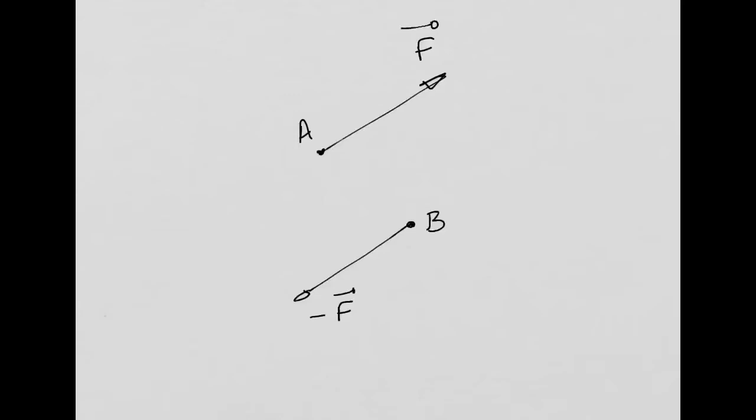If you have two forces that are opposite, with the same norm but opposite direction, they cancel each other. These two forces form what we call a couple. Not difficult to memorize this, I think.

So what I'm going to do now is calculate the moment produced by this couple, or by these two forces, about, for example, this point O.

In order to do that, I need to define my position vectors. I need to define this position vector connecting point O to point A, which I'll call ROA. And I need to define this position vector connecting point O with point B, which I'll call ROB.

So we have a couple, these two symmetric forces, and I'm going to calculate the moment produced by this couple about point O. That moment, MO, is equal to the cross product of my position vector ROA with my force F.

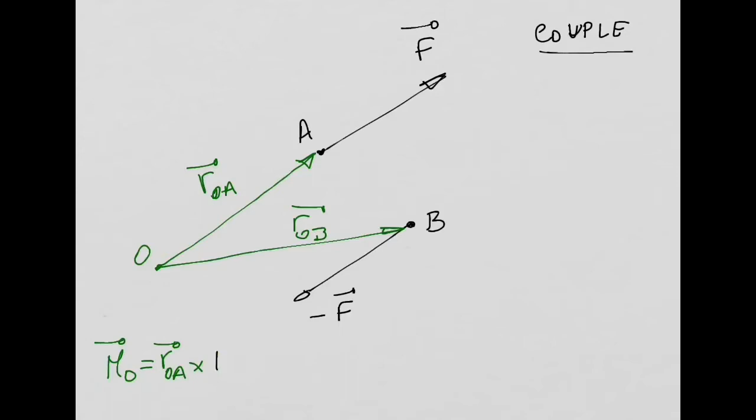Plus the moment produced by my position vector ROB times my force, which is minus F. You all agree with me?

So I have two forces here, F and minus F. I want to calculate the moment about point O. I just need to add the contribution of my force F to the moment plus the contribution of my force minus F to the moment, right?

Now I can work this a little bit. I can say that I will have ROA minus ROB, sending this minus sign to the position vector. I can do that, and then I multiply this by F.

And now this ROA minus ROB, this term here, I'm going to say is equal to my R vector, or if you want, I can say this is going to be equal to RBA, which is a vector connecting point B with point A. So I am subtracting two vectors, and the result of that subtraction is this vector that you have here in red, RBA, connecting point B with point A.

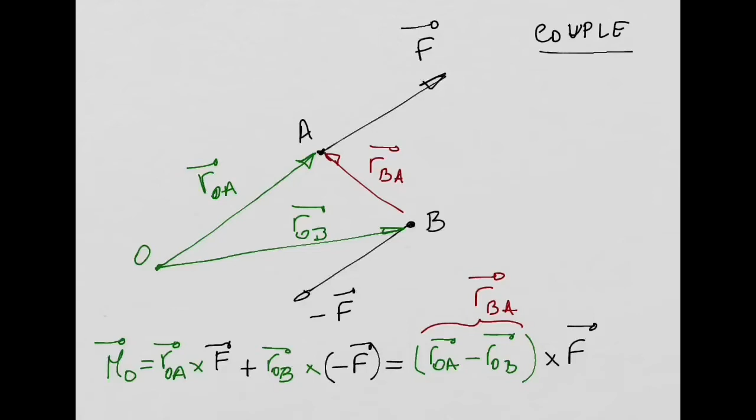And then I can say that this is going to be equal to RBA, external product or cross product with my force F.

One important conclusion: the result of the moment produced by this couple of these two forces, F and minus F, is going to be this cross product of a vector that only depends on the position between point B and point A. So basically, we evaluated the moment about point O, but the position vector starting on point O does not appear there anymore.

Someone was asking something. Question here? Is that F the resultant force of F and minus F?

Yeah, it's the same. Look from this equation: what we did was we sent this minus sign that you see here to the position vector, and then we used the distributive property. If you multiply ROA with F, you get this term, and if you multiply ROB with F, you get this other term here.

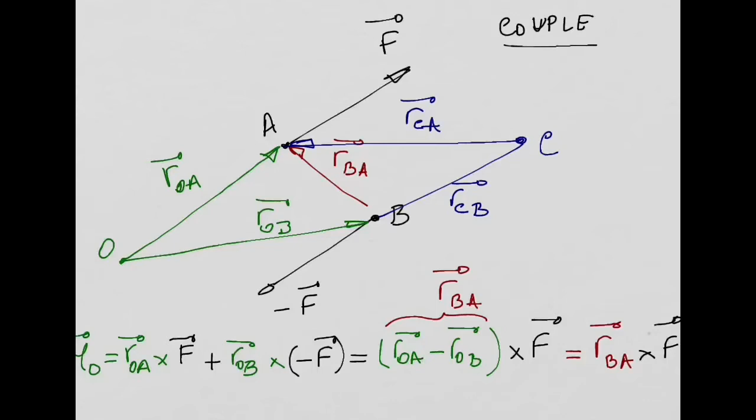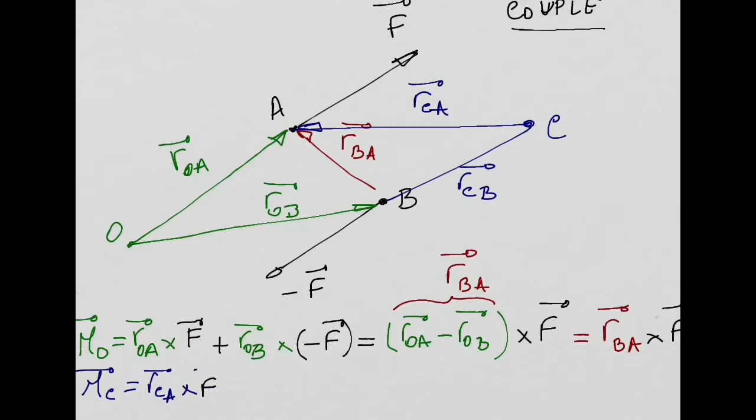If I want to calculate the moment about point C, I will have to do it in a similar way. So I will have my position vector RCA, cross product with my force F, plus my position vector RCB, cross product with my force minus F.

That will be equal to RCA minus RCB, cross product with my force F. And my conclusion is this is going to be, again, equal to RBA, cross product with F.

Which is an amazing result, right? Look at this, it doesn't matter basically. So we obtained the same result as when we calculated the moment about point O.

So it means it doesn't matter which point I choose to evaluate the moment produced by this couple. That moment will always depend on the position vector connecting the two points A and B where the forces are applied, cross product with my force vector F in the couple. This is a very important property of this couple - it doesn't matter which point we choose to calculate the moment, we can always obtain the same result for the moment produced by the couple, which is RBA cross product with F.

So we are going to see in the second half of the lecture how we can use this very important property to solve our equilibrium of 3D rigid bodies. Without this, we cannot do it.

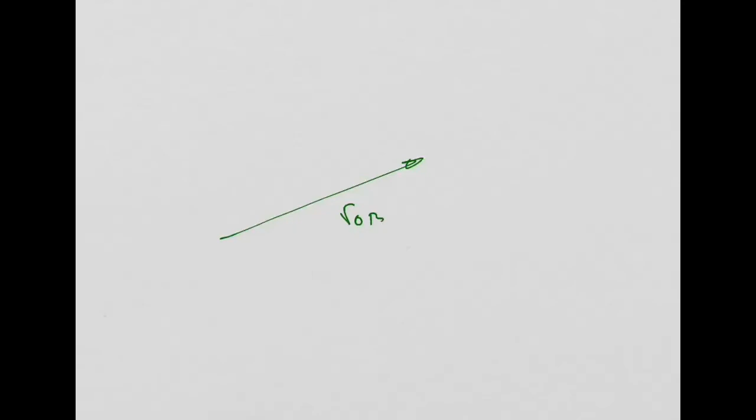A position vector starting at point B and going all the way to point A, and not the other way around. The reason is, and I'm going to do it here, you get this vector which is ROB connecting point O with point B, and you have this vector which is ROA.

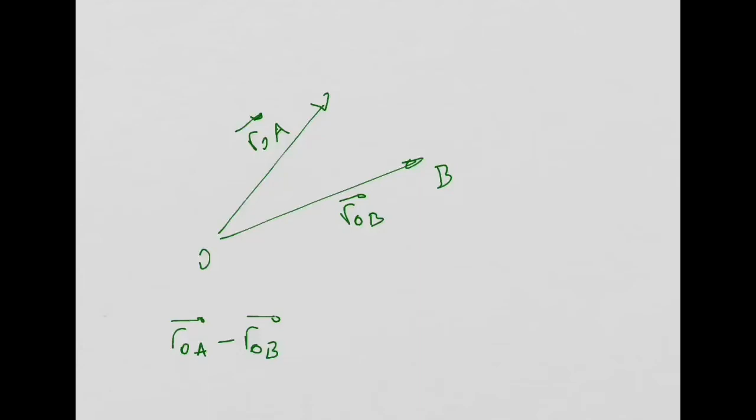And then what we want to do is ROA minus ROB. Correct? And I can write this as an addition of these two vectors - this is equal to ROA plus minus ROB.

You all agree? What I'm doing basically, let me move this a little bit more here. If I use this vector, this is my minus ROB. Agree with me? So if I add these two vectors now, I need to draw parallel lines to these two vectors.

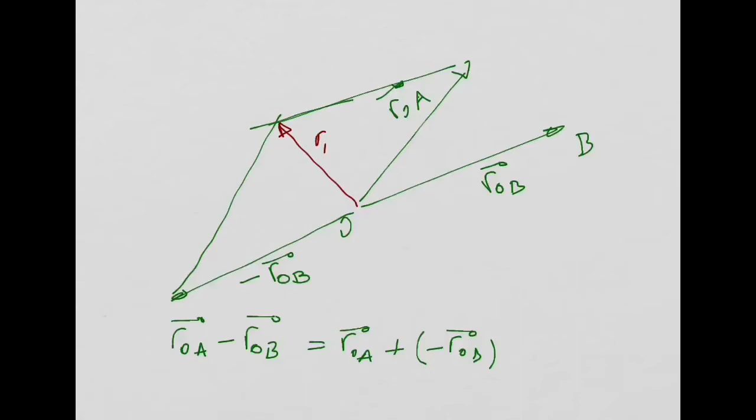And then this is going to be the result of my addition. So this is going to be RBA, which is equal to ROA plus minus ROB. So this RBA that you have here in red, don't forget this is my point B - this is in fact a vector starting at point B and going to point A, not the other way around.

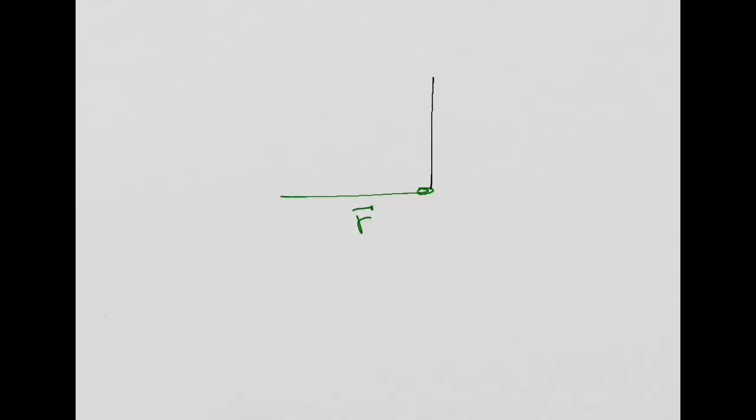So that was one first question you asked me during the break. The second question was again something regarding the moment. I was given this situation in a 2D problem: if we have a position vector like this, a force vector like this, the question was, we learned in A levels that we obtain a moment which is an anti-clockwise rotation. If you think carefully, this anti-clockwise rotation is going to be about an axis with the direction of my z-axis. It's going to be a rotation about the z-axis, agree with me?

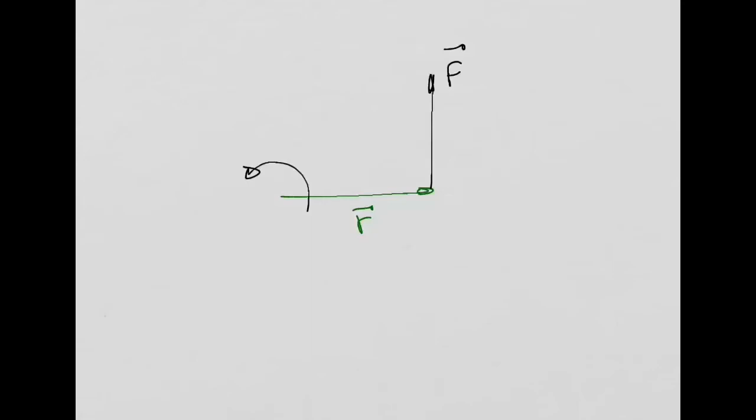So if you use your right hand and align this with the position vector, let me try to do it graphically. You have the position vector and the force vector here. So when you calculate the moment, if you align your fingers of your right hand with your position vector like this, and then rotate your fingers from R towards the F vector, your thumb will give you the direction of your moment. Look at this - if my fingers are aligned with R, and I rotate through the F direction, anti-clockwise in this case, my thumb tells me my moment is in the Z direction - a rotation about an axis in the Z direction.

Yeah, this seems similar to the right-hand grip rule. Yeah, that's it, that's what I'm saying, thank you for the English correction. That's exactly what I'm saying - right hand rule, that's what I'm saying. So the right hand rule is: you use your right hand, align your fingers with the position vector, rotate your fingers towards F, and then your thumb will tell you the direction of the moment. Z, right? That's how it works.

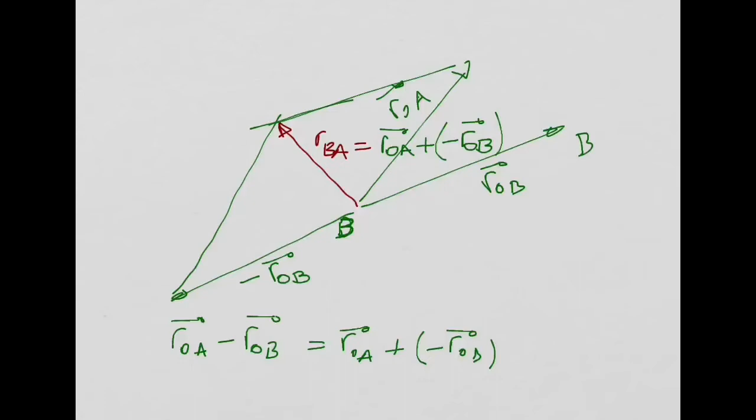Don't you agree? If you pull with this force, it will rotate about the z axis anti-clockwise. So if you rotate anti-clockwise around your z axis, you will move in the positive z direction. Haven't you guys ever opened a bottle of wine?

If you know the cork opener: if you rotate clockwise, the cork opener is going down, into the cork. You're rotating clockwise, so you're going down. So when you rotate anti-clockwise, the cork opener is coming up. Imagine you have a z-axis aligned with the cork, positive z is in the upward direction. If you rotate anti-clockwise, you are moving in the positive z direction. That's why when we have a moment anti-clockwise, and if that anti-clockwise rotation is in the same direction as the z-axis, we use it as positive.

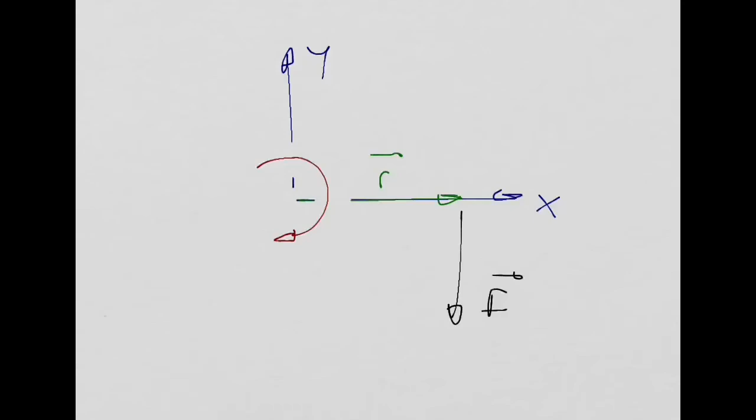That's why I recommend you guys to always use the cross product, because if you do this cross product we can do it very quickly. The moment is going to be equal to this cross product. The position vector is in the x direction, the force vector is minus F in this case, agree with me? So if you do this external product, you get a vector in the z direction equal to minus rF.

Here it is: clockwise, negative moment in the z direction. So if you do the cross product, even in a 2D problem, you always get the result correct automatically. You don't need to worry if it is clockwise or anti-clockwise, it comes out automatically. So I strongly recommend it, it's not difficult, you just need to memorize this cross product rule, put that in your head, then your life will be very easy.

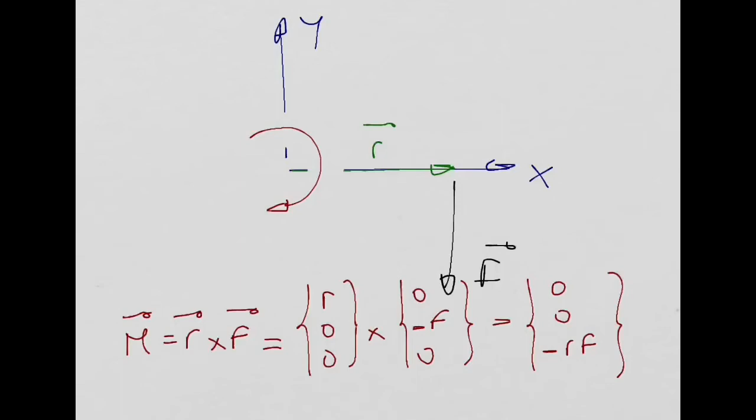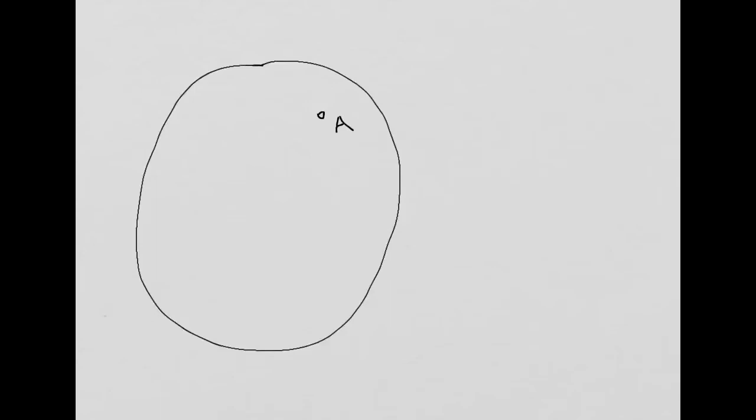Okay, so I need to start now talking about, otherwise we don't have time, a very important issue. So I'm going to do the following: imagine you have a 3D structure, a very generic structure. I represented the structure like that. And then imagine I have this point here, let's say this is my point A. And at this point A, I have this force F applied at point A in my structure.

Now imagine that I have here another point B, and I have this force P, for example, applied at point B. And I have a point C here with a force T, and so on. Imagine I have many different forces applied at different points of my structure.

So I cannot just come here and say, well, my equilibrium equation is summation of forces equal to 0. We will need this to study the equilibrium, but it's not enough. The reason is because all these forces are applied at different points, not in a single point like we did last week for the equilibrium of a particle. So I need to have something more to study the equilibrium of 3D rigid bodies.

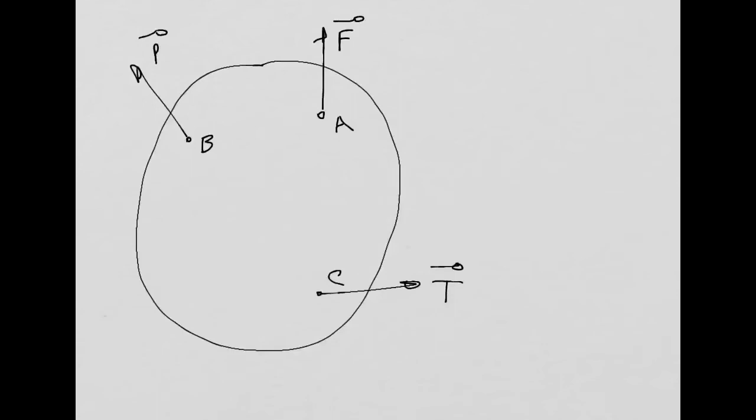And what I'm going to do is start with a very important procedure, which is to get an equivalent system. So we have this 3D rigid body with a force F applied at point A, and I want to get an equivalent system at point B, where I want to replace that force at point A and move it to point B, but I want to maintain the equilibrium of the structure. I cannot destroy it. So how do I do that?

So what I'm going to do is something like this. I'm going to include at point B a force F, the same force that I have at point A. I'm just going to copy that force to point B. But if I do only this, I am altering the equilibrium, I'm changing the equilibrium, right? This is not the same as the initial configuration with a force only at point A. This is completely different. So how do I make this the same?

Well, I make this the same if I include a symmetric force here at point B, minus F. So if I add at point B a force F and a force minus F, they cancel each other, then I get exactly the same initial problem.

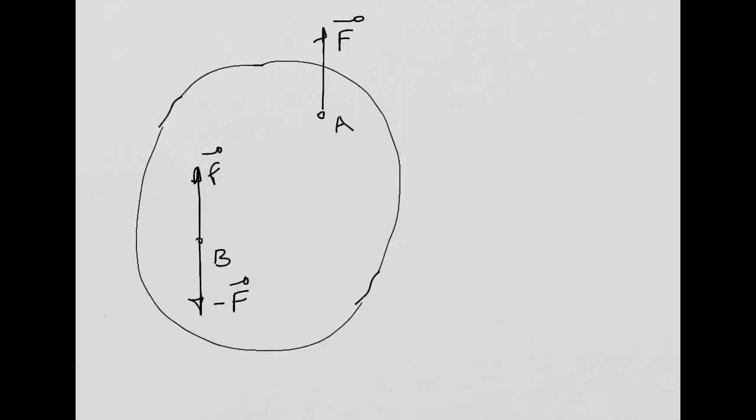But now you might be asking, why did you do all of that? It seems your system is much more complicated. You didn't simplify anything. Not yet, because if you look at this force F at point A and this force minus F at point B, they form what? A couple. Exactly. So we are going to focus on this couple now.

What did I tell you about the couple? Summation of forces produced by a couple is equal to 0. So what I'm saying is that this force F at point A and this force minus F at point B, they will cancel each other in terms of forces. But a couple introduces a moment. And how much is that moment?

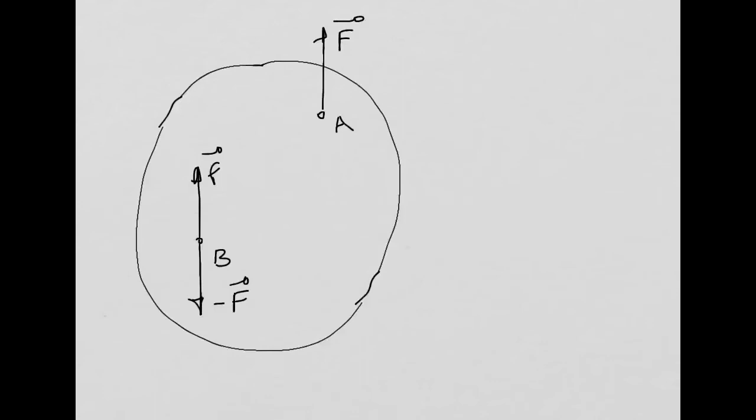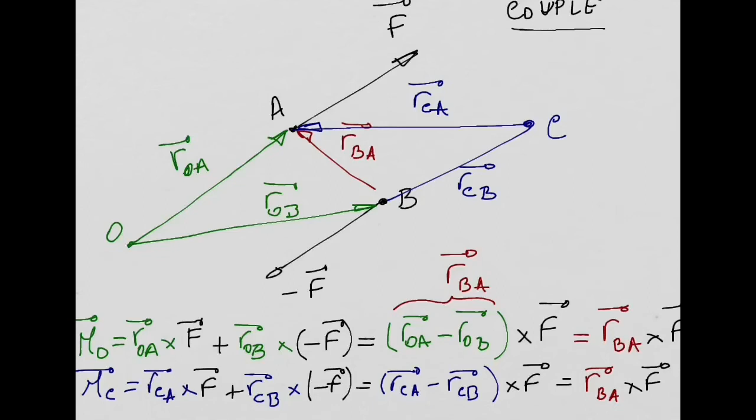That moment is equal to the cross product of this position vector connecting point B with point A. So the moment produced by that couple, I'm going to say M is equal to the position vector RBA, external product with my force vector. This is exactly what we obtained in this slide here when we calculated the moment produced by a couple: position vector connecting the two application points of the forces of the couple, cross product with the force. So this is a very, very important result.

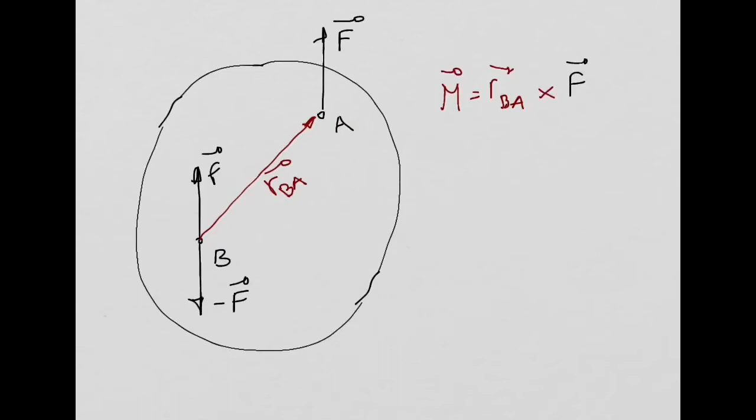Because now I can replace this couple, this F force and this minus F force, with the moment M. I can do something like this: look at this, I can remove this force F at point A, I can remove the force minus F at point B, and the only thing I need to do now is include the moment produced by the couple, and that moment M is equal to RBA cross product with my force F.

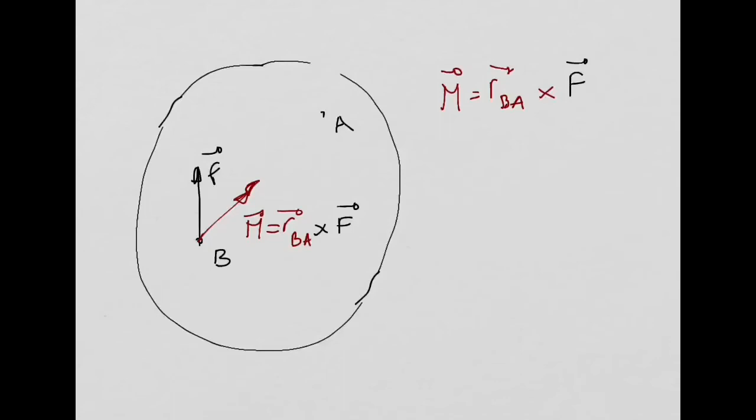And then look what I have. So I'm going to write on the right hand side here, I'm going to try to draw the initial configuration we had before. So before we had at point A this force F. And then I can say that these two systems, they are equivalent.

Our original system, this one on the right, with a force F only at point A, is equivalent to this system on the left with a force F at point B and a couple M, which is equal to R from B to A crossed with F. So I transferred this force from point A to point B, but when I transfer the force, I need to add the couple, the moment produced by it. At the end I will have an equivalent system: force plus a moment produced by a couple.

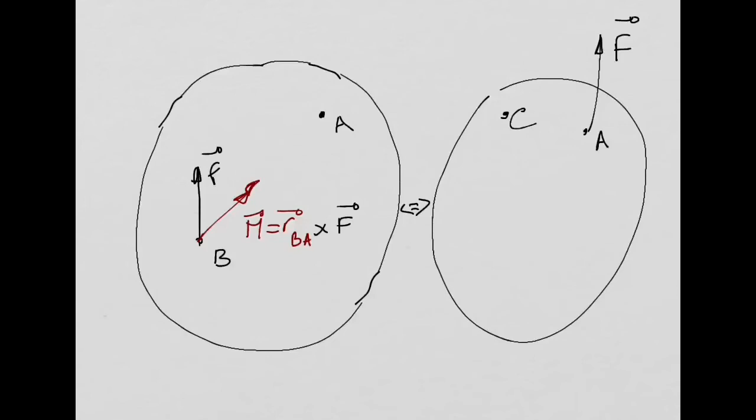Why is this important? Imagine I have a point C here with a force P, in a different color. Imagine this is my initial system: point A and point C, with a force F at point A and a force P at point C. We already transferred the force from point A to point B, adding a moment. I'm going to do the same for this force at point C. So I include a force P here, the same as at point C, but I need to add a couple, which I'll put in green.

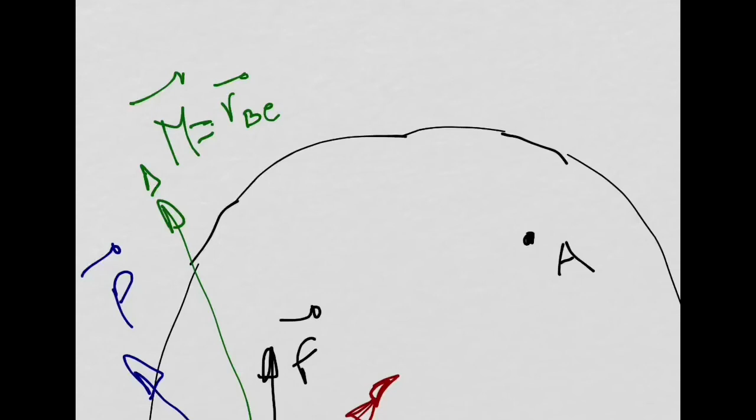This couple, M in green, is going to be equal to my position vector connecting point B and C — let me zoom in a little — position vector connecting point B and C, external product with my force P.

Of course, I can now add these moments, the one in green and the one in red, together to have only one vector, the total moment. I can do the same for the forces: add my force F and P to have a resultant force. And I can continue — if I have another force at a different point, I can also transfer everything to point B by adding the force plus a moment.

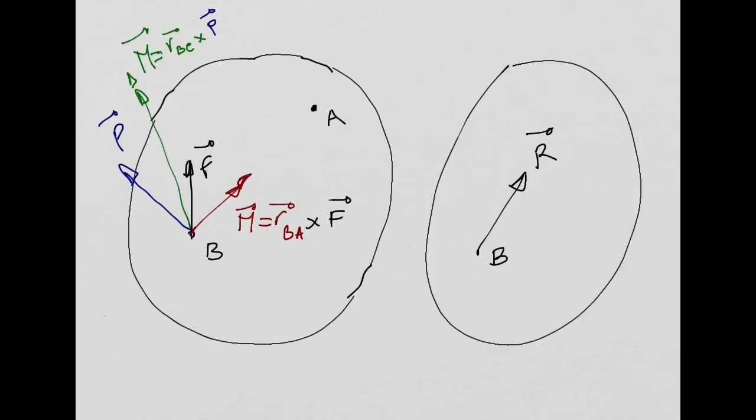Why is this important? Look what happens now. I'm going to copy this and paste it here. So what I'll say is that at point B I'm going to have a resultant of the forces. This resultant of the forces, as you know, is the summation of all the forces we have in the body. This is the resultant of the forces, and I'll put it here in red.

I'm also going to have a vector Mr, which is a moment. This Mr is going to be a summation of all the moments: Ri cross product with Fi, a summation of all the moments. In this case, it's equal to the summation of the moment in green with the moment in red. So I add all these vectors together and get a resultant for the moments as well.

Then I will have this equivalent system on the right hand side, where we have everything — forces and moments — concentrated in one single point of our structure. And what are we going to do now to study the equilibrium?

Well, I'm going to say the resultant of the forces needs to be equal to 0 to be in equilibrium. So in a 3D problem, we have three equations: summation of forces in x equal to 0, summation of forces in y equal to 0, summation of forces in z equal to 0. Three equilibrium equations. And the resultant of my moments also needs to be equal to 0 to be in equilibrium.

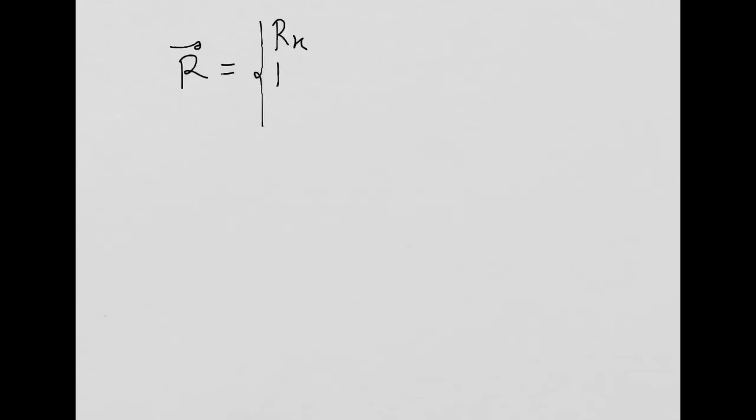We will have three additional equilibrium equations: x component of the moments equal to 0, y component of the moment equal to 0, z component of the moment equal to 0. So what I'm saying is that the resultant of the forces — we have x, y, and z components — all need to be equal to 0.

The resultant moment, at that point, we will have a component in the x direction, a component in the y direction, and a component in the z direction. They will all have to be equal to 0 as well.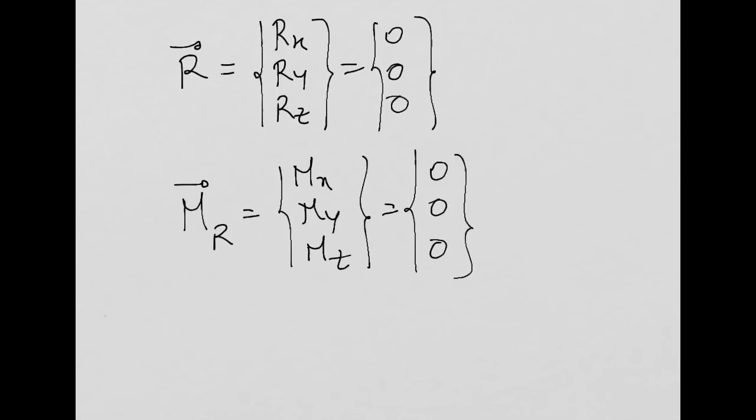Why should the moment be 0? It's the equilibrium equation for the moment. So when we studied particles, we said the summation of forces need to be equal to 0 - the balance of forces, right? I gave you an example. You see, we have to do the same for the moments. The moments also need to be balanced. All the moments you have at that point need to be in equilibrium, balanced, so that means equal to 0.

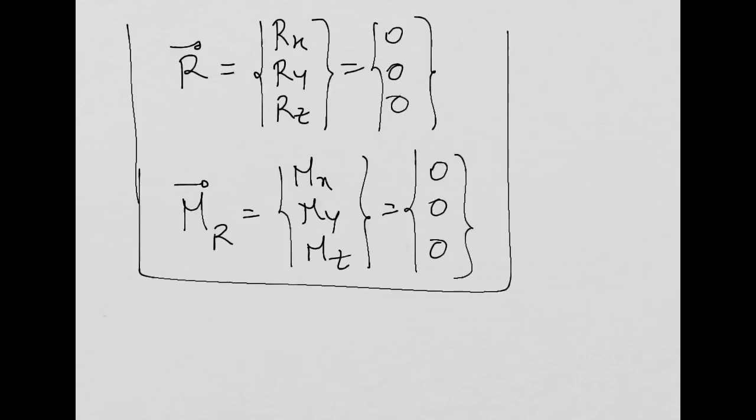Okay, so this is the equilibrium equations you have for a statics problem. So we are going to do many examples now, and we have a lecture in the afternoon, right? We are going to do some examples, application of this.

But what I want to emphasize is this procedure that we did. I'm going to summarize again because this is extremely important. So the situation is we will have a complex structure with a complex geometry and many forces applied at many different points. How do we study the equilibrium of that structure? Well, before we start writing the equilibrium equations, we need to build an equivalent system force-moment.

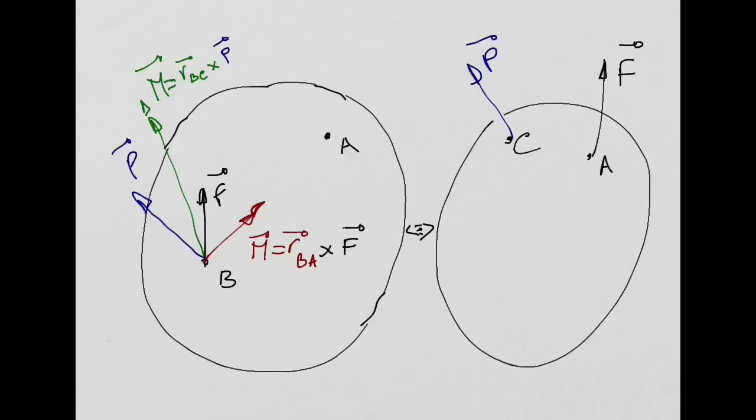How do we do that? Well, we take advantage of the moment produced by a couple. The moment produced by a couple allows me to transfer a force from one point to another by adding a moment, the moment produced by the couple. So I can do that for as many forces as I have in my structure. At the end, I will have everything concentrated in one single point of my structure. This point can be any point you want, you choose for convenience.

Of course, we are going to do many examples where I ask you explicitly to construct the equivalent system force moment at point A or at point O. I will ask you to do that. But when you are solving an equilibrium problem, this point B that we have here in the slides can be any point of your structure. What it means is that you need to concentrate everything at that point - the resultant of the forces and the resultant of the moments.

Once you have everything concentrated at that point, then you can say, if this point is in equilibrium, or if these two vectors, resultant of forces and resultant of moments, are equal to 0, then it means my entire structure is going to be in equilibrium, not only this point. That's the big advantage of this, because we built an equivalent system concentrated in one point. So basically, I transformed the equilibrium of a 3D rigid body into an equilibrium of one point. Of course, we have the moment there, but that is the big advantage of this procedure, okay?

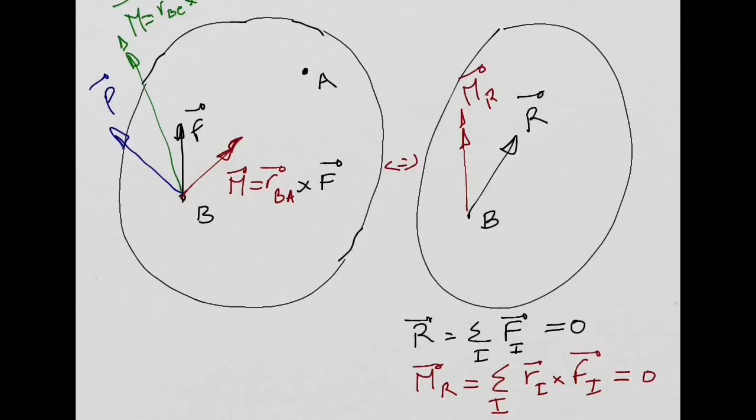So let's do one quick example just to show you how this can be done. So I'm going to stop this one and start a new one.

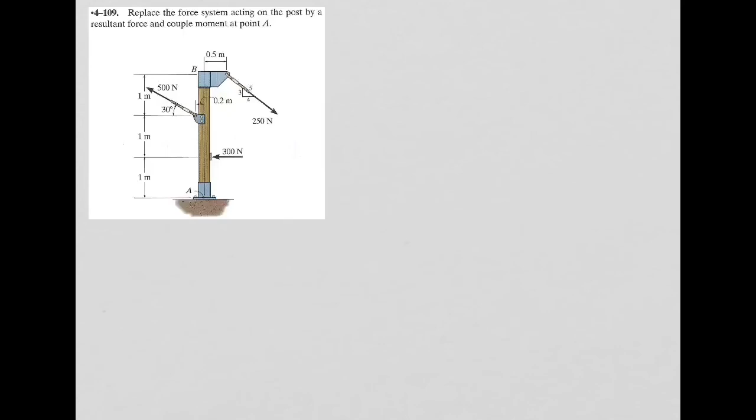So in this example, you have this structure, this column here. You have basically 3 force vectors applied at 3 different points. You have these 300 newtons here, this 300 newton horizontal force applied at this point. You have these 500 newtons, this force in this cable that is applied at that point there. And you have another force here. So you have a 3D rigid body with 3 different forces applied at 3 different points.

The question is, I want you to build the equivalent system, force and couple moment, at point A in this case. This is an example I took from the Hibbeler book, which is the book we recommend for this module. Hibbeler is the name of the author. The title of the book is Engineering Mechanics: Statics. You have many copies of this in the library. We follow this book, but you have also many different books in the library, so you can just go there and grab some books and do some examples if you want. Okay.

All right, so let's do this. So we need to build what? We need to build at point A. So basically, what I'm saying is, you need to have a resultant of the forces R, and you need to have a resultant of the moments MR. Okay? So let's start with the resultant of the forces.

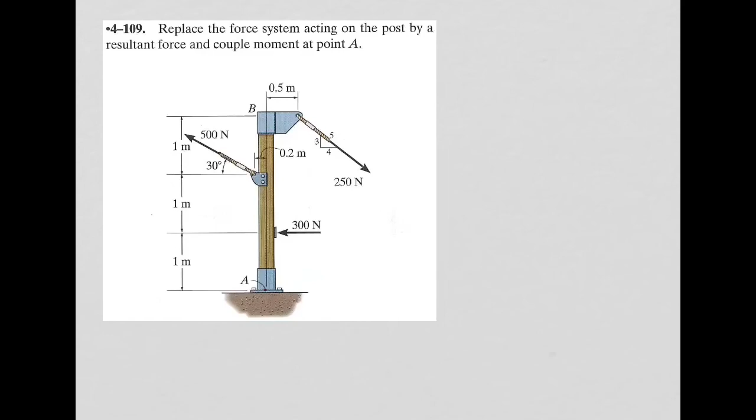Let's do it here. So, resultant, I just need to add all my force vectors that I have, right?

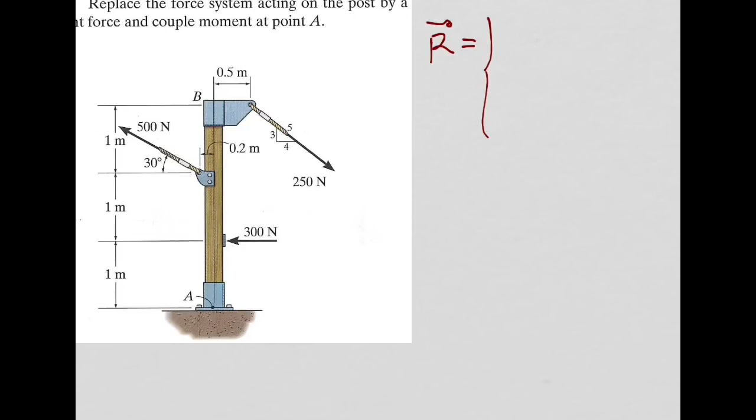So let's start with this one. Of course, we need to have a coordinate system. Let's say I will consider this to be my x-axis and this to be my y-axis. Z is perpendicular to these two. So this 300 newtons here, it only has a component in the horizontal direction, so I can say this is equal to minus 300, 0, 0.

This force vector is this one, plus. I'm going to continue here below. Now let's do, for example, this one, this 500 newtons. You tell me how much is the horizontal component of this one? Minus 500 cos 30, is it? The vertical component in the y direction? 500 sine 30. Z component is 0, right?

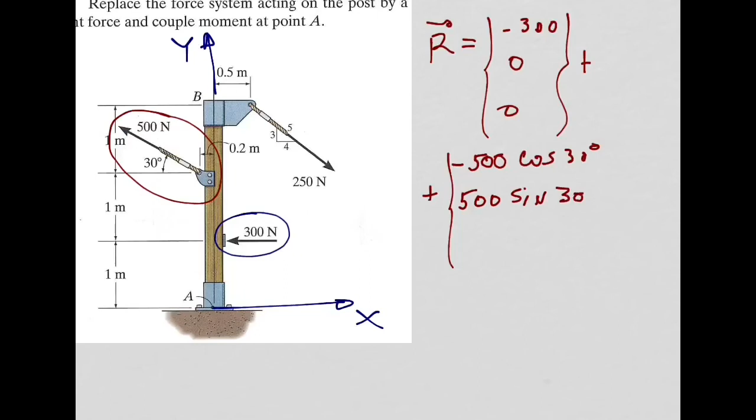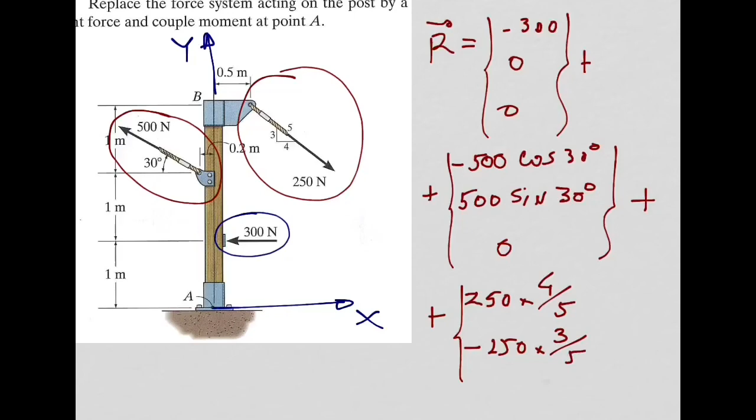And now the last one is this. You tell me horizontal component, 250 times 4 over 5. Is it the sine of that angle, right? Is 4 over 5. Vertical component. How much is it? It's positive or negative? Negative. 250 times what? 3 over 5. Z component is 0.

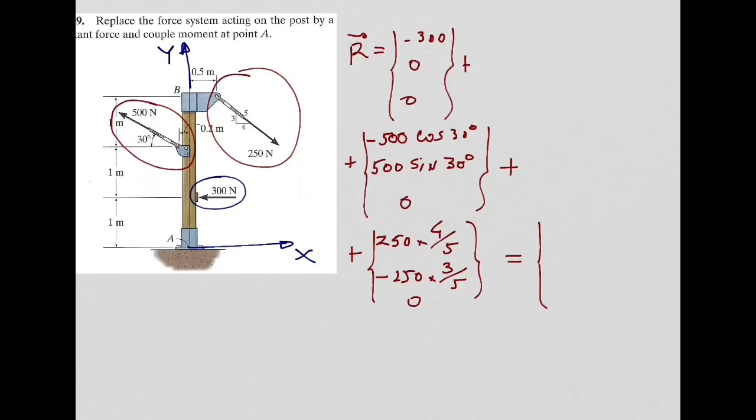So it means we will have this resultant vector is going to be equal to, can you please do this? So you have minus 300 minus 500 cosine of 30 plus 250 times 4 over 5. How much is this, please? Can someone do the calculations for me? Minus 533. Minus 533. So I'm going to just replace that one here. Minus 533. That's it.

Now the y component is 500 sine of 30 minus 250 times 3 over 5. How much is this, please? 100. Huh? 100? Okay. It's positive, right? 100. Z component is 0. So this is our resultant of the forces. Let me just...

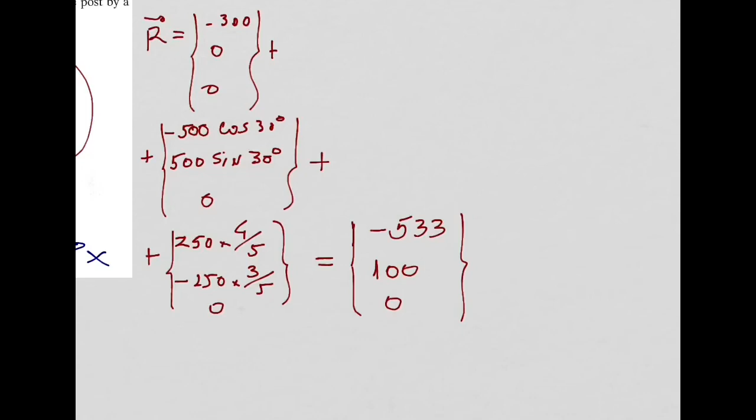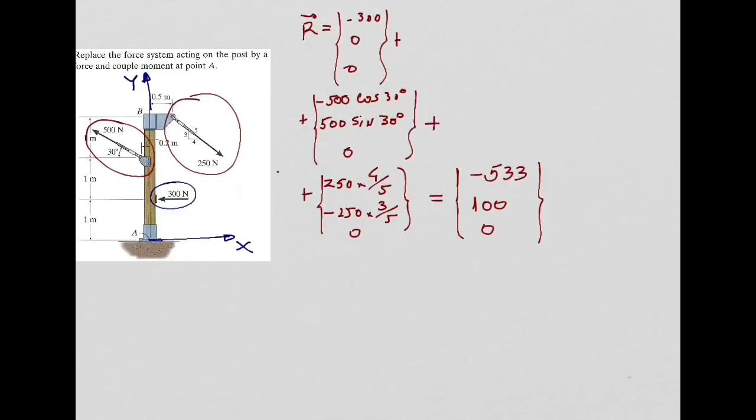Okay? You all agree with this? Now, for the moments, let me try to move this. Now, for the moments, we will have basically to calculate the moments about point A. Okay, we will, of course, we need to construct this couple. So let's do the couple one time and then we will do it in a quicker way.

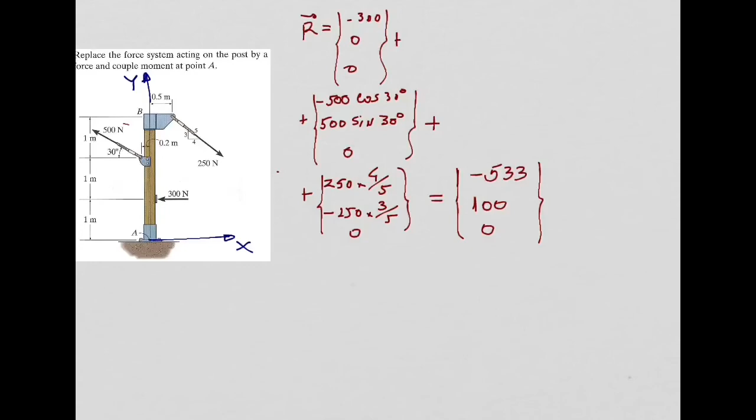So let's do, for example, for this 300 newtons. So let's start with this one first, this 300 newtons. So let's build a couple for this 300 newtons. In order to build a couple, what I'm going to do is I'm going to add, so let me zoom in. I'm going to add this 300 newtons here. And then, of course, I need to add this minus 300 newtons in this direction, right? So where is my couple? My couple is this with this, right?

And how much is that moment? So what is my position vector that I need? I need position vector connecting point A with this point here. I need this position vector in blue. Let's say this is my R1 position vector. I can say this R1. What is the x component of this position vector? 0. What is the y component? 1 meter. Z component 0.

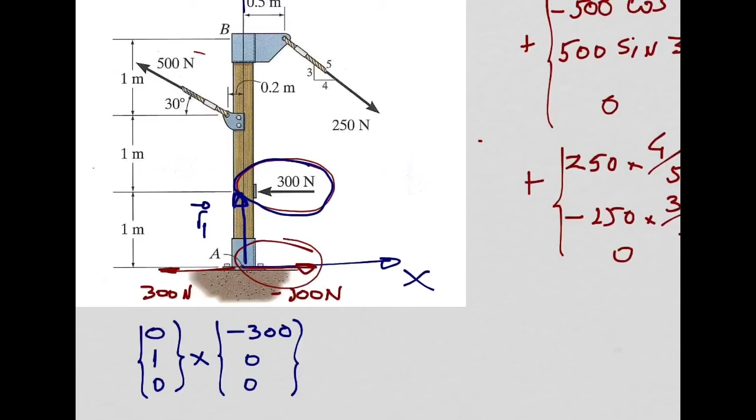And in order to have the moment produced by this couple, I need now to do the cross product of this with this force vector here, 300 newtons. What is the x component of this 300 newtons? X component, how much is it? Plus or minus? Minus. Y is 0, Z is 0. So this is the moment produced by these 300 newtons about point A. Let's see.

Now, for the other forces, we can do a bit quicker. So I need to add now the moment produced by this force. Let's focus on this one now. So I need to add here. I need to include first the position vector. So starting at point A and going all the way until this point. This is my position vector, R2, let's say like this. I need to define this position vector. What is the x component? 0. What is the y component? 2. What is the z component? 0. Now I need to define this force vector here.

X component, minus 500 cos 30, agree? Y component, 500 sine 30, very good. Z component, 0. So the moment produced by that force about point A is the result of this cross product. That is done as well.

So the last one we have to do is this force, now this one. Okay? So I need to add now. So my position vector, what is my position vector? My position vector is this one. Oops. Let me try to do it. This, wow, what's going on? This one here. So this is my R3.

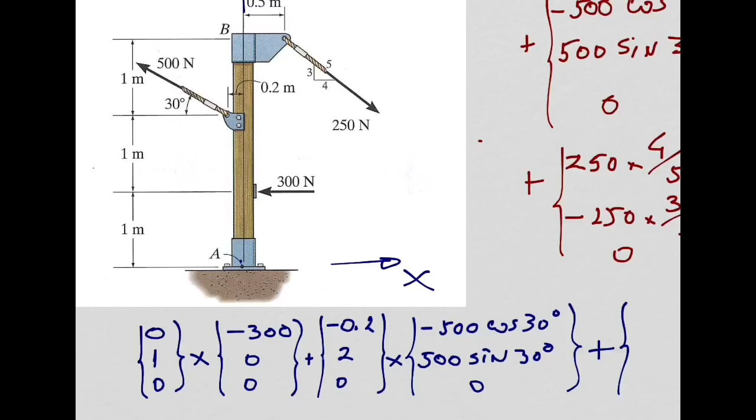Now let's go back to our position vector, which needs to be this one, our R3, for this force. We are doing this 250 Newtons now. The moment produced by this 250 Newtons about point A.

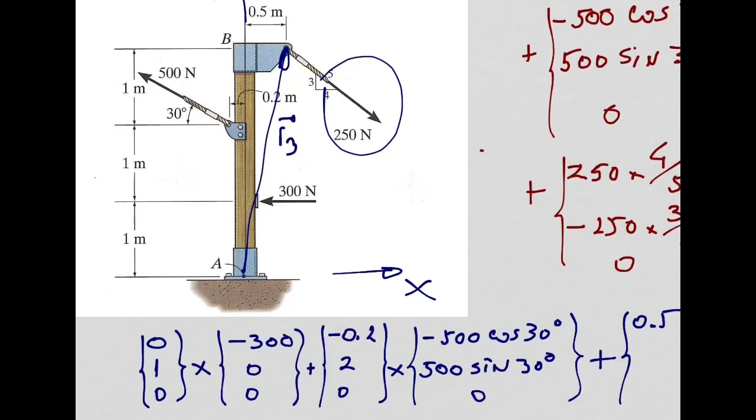So position vector first, you tell me, x coordinate, 0.5, y coordinate, 3, z is 0.

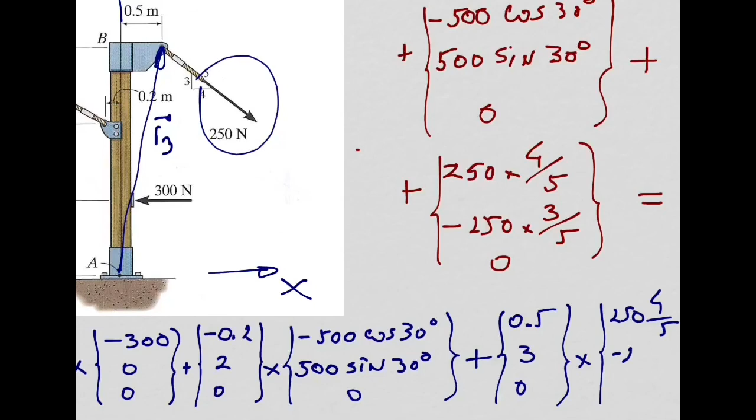External product with the force vector, you tell me, x. I think we did the force vector already, right? Is this one, right? You all agree with me, this is my force vector, so I can just copy this one. I can say it's 250, 4 over 5, minus 250, 3 over 5, 0.

So if you do this, you have here this cross product you need to do, another cross product, another cross product. The good news is that it will have only component in the z direction. You can confirm that at home when you do these cross products, these calculations. This z component, this one here, this one here, you need to calculate at home, we don't have time for this. We can do this one eventually, which is very easy.

This first one is 300, right? This second one, if you want, I can put it this way: minus 100 sine 30 plus 1000...

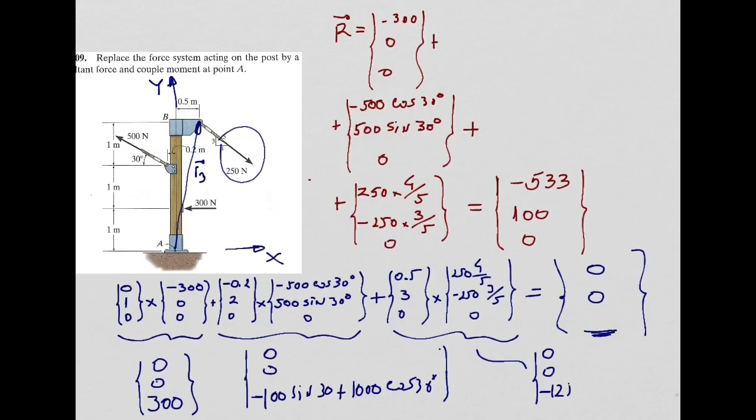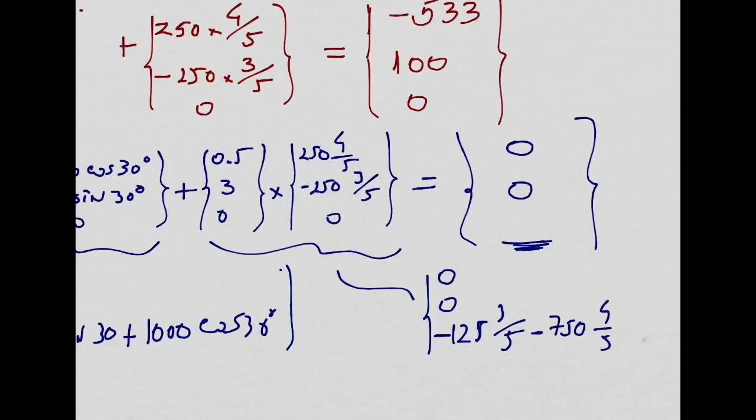cosine 30, and this one 0, 0, you will have minus 125, 3 over 5, minus 750, 4 over 5, right? So if I didn't make any mistake doing these multiplications, that's what you have. You just need to add all of this together, and then you will obtain this z component here for the...

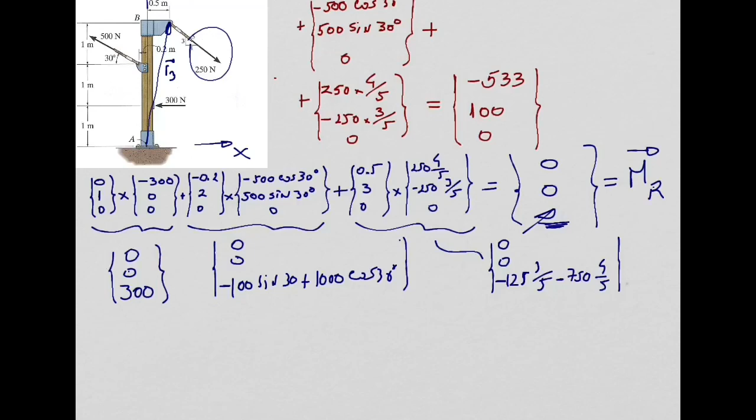Don't forget, this is our... this is going to be equal to my resultant moment. So what is going to happen is, at the end...

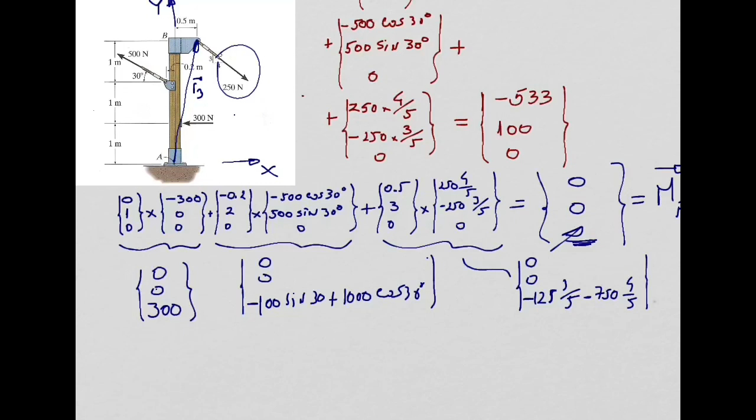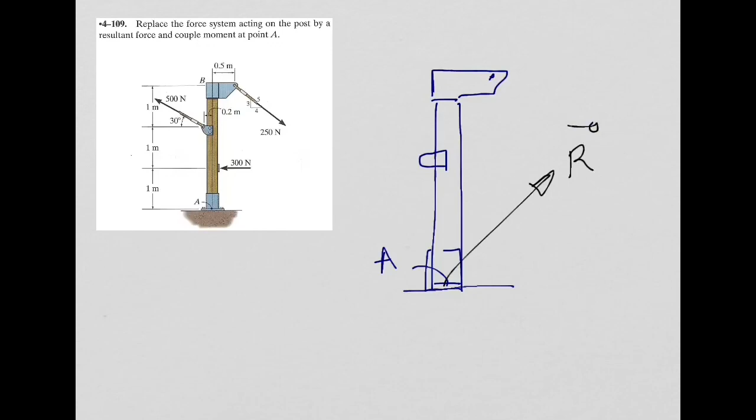Let me try to copy this, paste. So at the end, what you are going to have is an equivalent system, right? So this is your point A. You will have this equivalent system where the only forces and moments you will have is a resultant of the forces, which is given by this vector here.

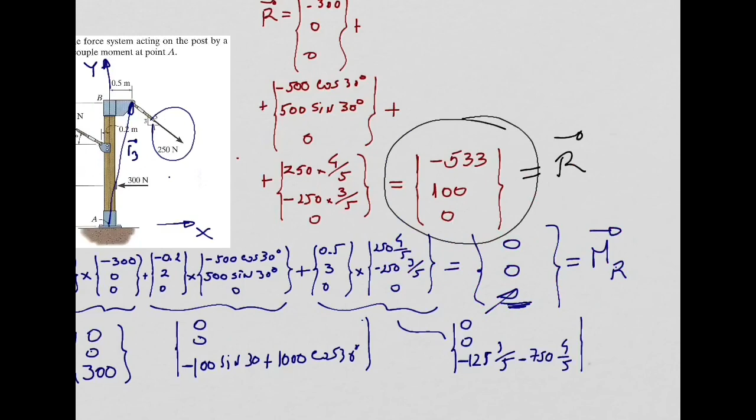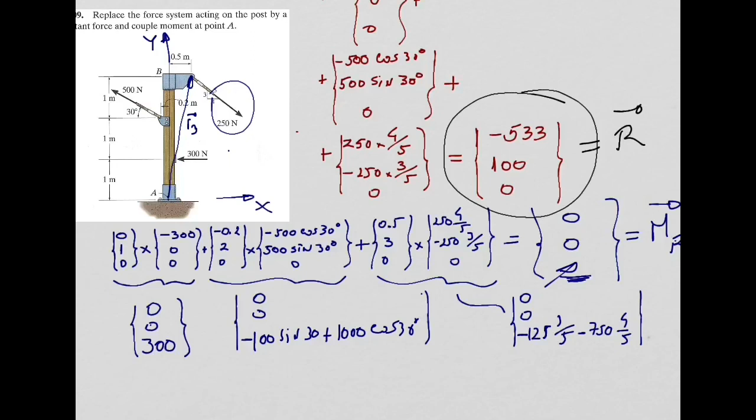Don't forget, this is our resultant of the forces, minus 533, 100. I can copy. You will have this for the summation of the forces, and you will have a resultant for the moment, which is going to be 0, 0, and the z component is equal to, maybe I can copy this over there, is going to be equal to 300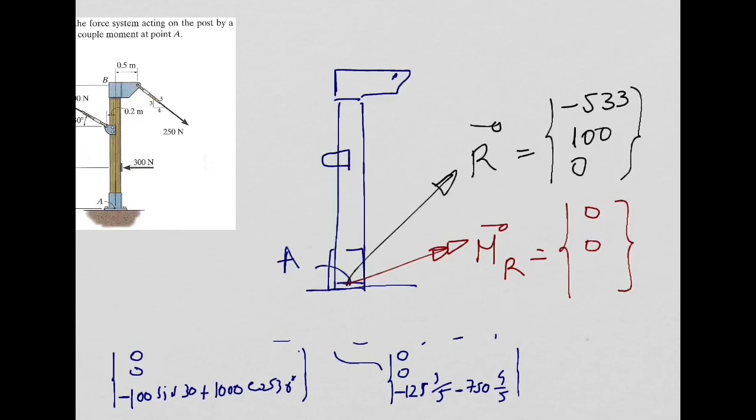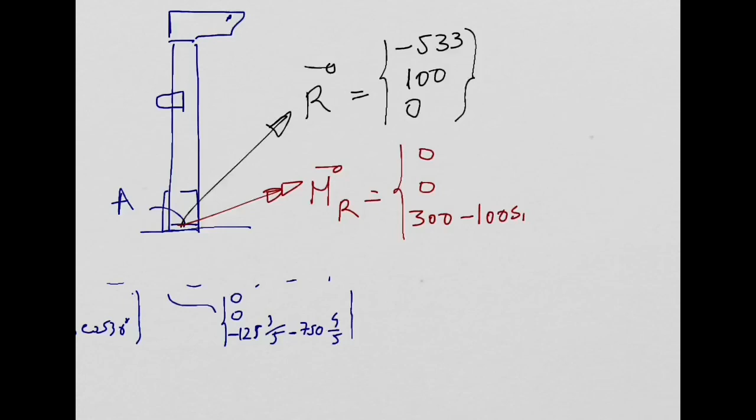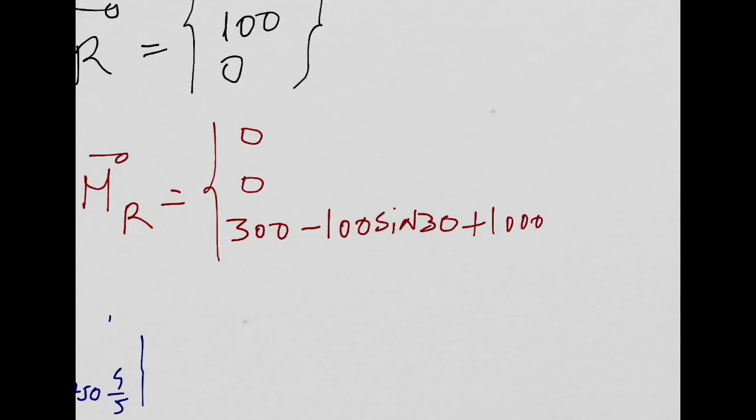minus 100 sine of 30, plus 1000 cosine of 30, minus 125, 3 over 5... sorry, I don't have space there. I need, so minus 125, 3 over 5, minus 750, 4 over 5. So this is going to be my MR vector.

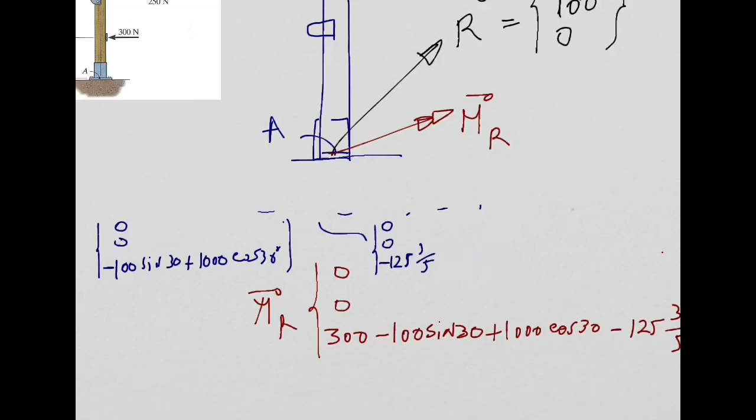Okay, and then now I can clean this a little bit more. That's it, that's what I want to show you. Oh, so I need to...

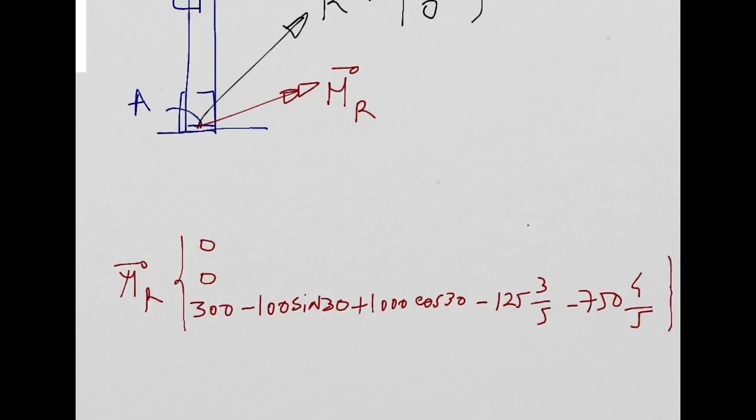So you will have, okay, now you can see, you will have an equivalent system in our structure, same structure, but everything now is concentrated at point A. You have resultant of the forces, this R vector, minus 533, 100, 0, which is the summation of all the forces, and you have the resultant of the moments, this vector in red, given by this vector with component in z direction only. Right?

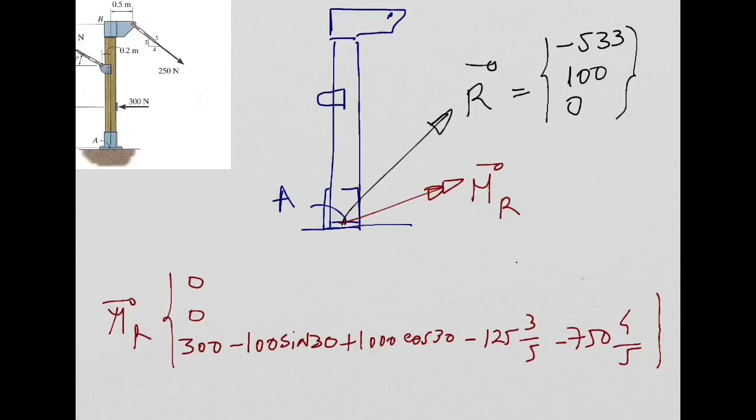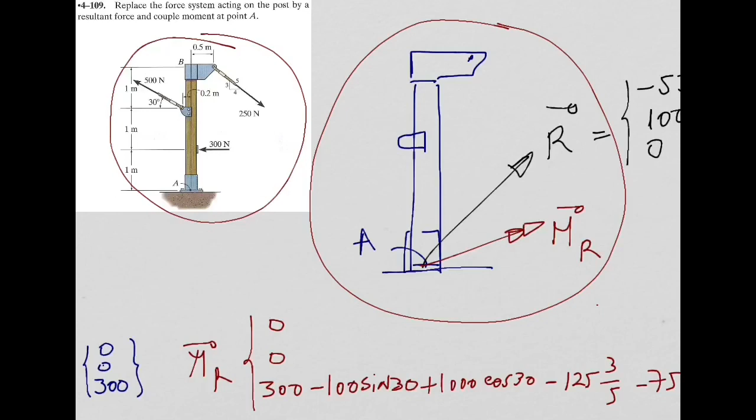So you can compare the two systems. The first one, where you have everything, three forces applied at three different points, and you can compare with this one where you have everything, the resultant of the forces and the resultant of the moments, applied at one particular point, point A. All right? This is very critical. In the afternoon, we are going to do a more elaborated example using this, okay?